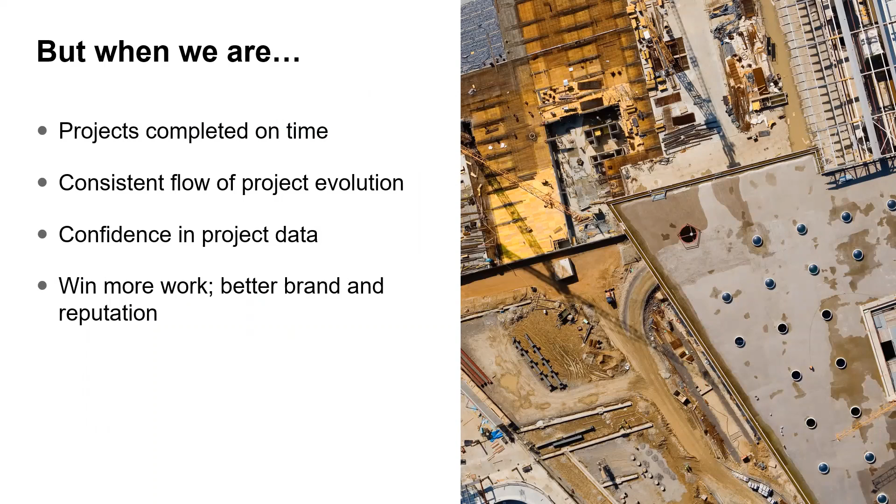Shared data allows assertive decision-making and enables predictive insights. Documents are shared so work happens from a single source of truth. All this gathered data enables construction teams to better deliver and even predict business outcomes. When we are collaborating effectively, important updated information is in the hands of those who need it. Issues can be shared across teams quickly, leading to faster resolution and helping us deliver projects on time and on budget. We'll now go into a short video outlining some of these functions.

The Autodesk Construction Cloud is built on the power of a common data environment, ensuring confidence in project data and a single source of truth. The common data environment starts with files, a configurable folder structure designed as an organized repository for all your project information, from Revit models to PDFs, Excel workbooks, and over 40 other file types, accessible and viewable for all project members. In the connected modules within the ACC platform, such as Build, the project management tool, we see the same file folder structure, ensuring a single source of truth for all project members interacting with the data.

Project members on site will have access to all the same files and folders through the Autodesk Construction Cloud mobile application based on their permissions as set by the project administrator. When we are connected through the common data environment, project members can have confidence in the information they are working with, such as the latest set of drawings, leading to less rework and on-time completion.

All right, now we'll be talking about controlled file sharing.

The Autodesk Construction Cloud includes extensive permission and file sharing features that allow you to ensure that the right project members have access to the right information, limit what certain roles or companies have access to, and share information with those outside of the platform.

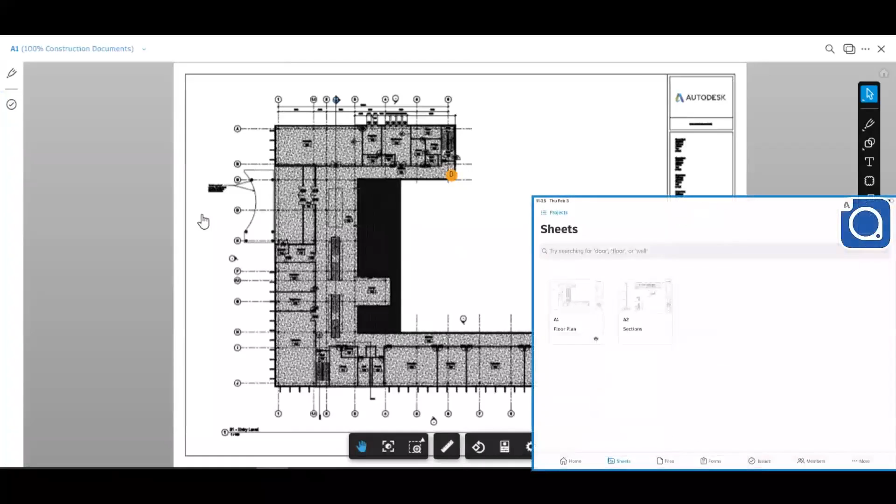Stay in control of who you share documents with, how long you share them for, and keep track of all your transmittals in one platform. On to real-time collaboration.

When we aren't actively collaborating amongst different teams across a project, we can run into a fair number of issues. Without a central source of truth for project documents, how can we be sure that everybody is working off the most recent information? On-site issues and requests for revisions are done by email or by phone, not easily tracked or documented, which can lead to more time spent hunting down documents or waiting for responses, which can affect the schedule and budget of a project.

Another issue is the inability to actually access model-rich information because you might not have access to the right type of software, whether it's Revit, or you don't have the expertise in working with Revit. But when we are collaborating effectively, less time is spent on rework because communication is easily tracked and important project information is accessible to everybody who needs it.

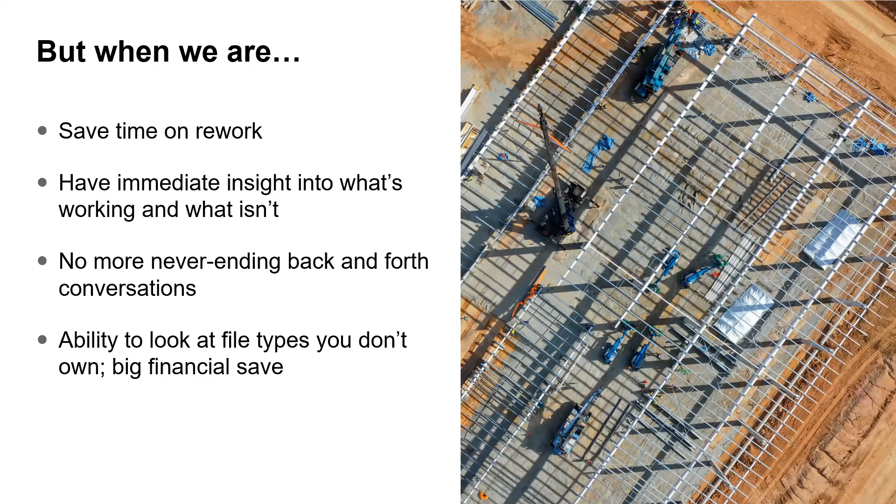Easily see and track issues across teams, you know who is working on what, and actually being able to access things like the model when you're in the field without any specialized software or any training to be able to extract some of that model-rich information and have it accessible to you. We'll get into a short video explaining all of that.

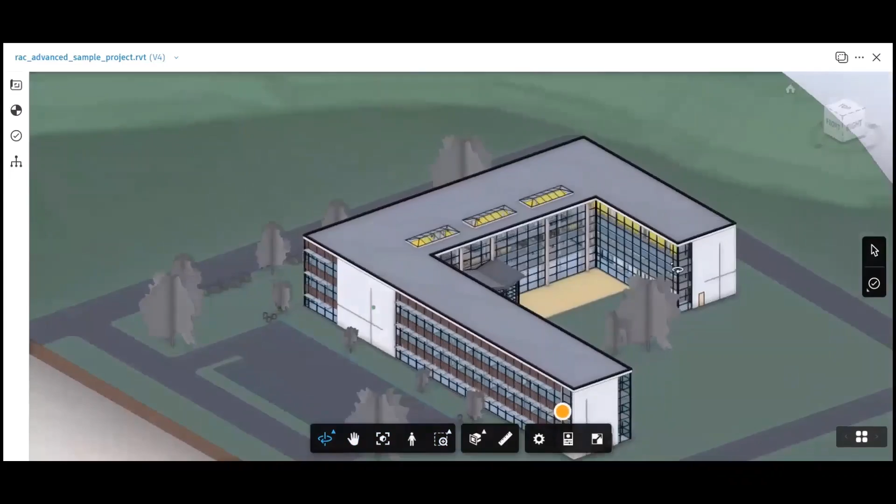Collaborate with team members in real time through in-platform model viewing and seamless communication in the form of RFIs, submittals, and meetings. Architects and engineers can upload their models to the ACC platform, making them accessible for viewing by all team members. Even if you have never used Revit, you can still access this file type on the ACC platform and take advantage of the rich data within, ensuring you stay up to date on all the latest 3D models.

Any unclear information coming from these models or drawings can be addressed through submitting an RFI. A formal request for information is used to obtain information from other project members. Track the status of an RFI after it was submitted, when it's in review, when it's received an official response, and finally when it's closed and distributed to the project members.

Similar to the workflow of RFIs, submittals are documents created for approval by the project stakeholders. Submittals are usually shop drawings, technical data, product specifications, or samples. They group into items, which consist of a document or group of documents, or packages, which consist of a group of items. Submittals go through a formal review process from a request for submission to closeout and distribution.

Another important tool for real-time collaboration is meetings. Use the meetings tool to create meetings, create agendas, including meeting topics and items, assign statuses to items, generate meeting minutes for important decisions, track attendance, and create follow-up meetings to track ongoing items and issues.

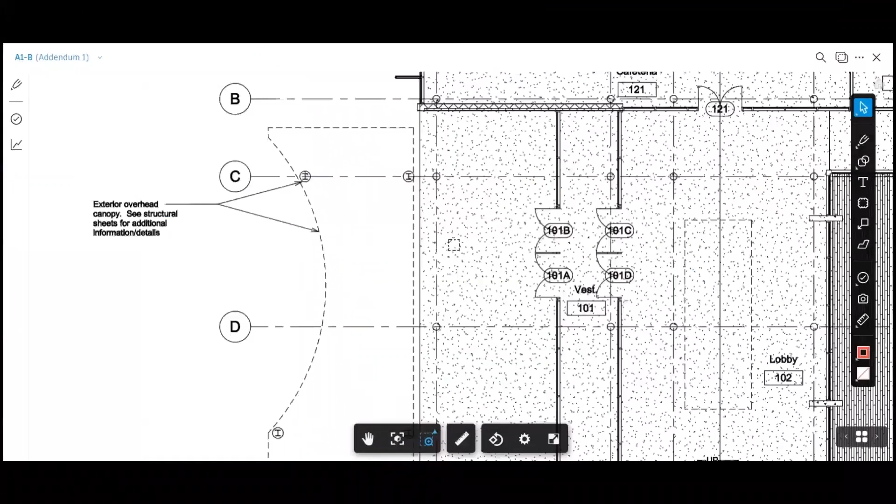When you observe an issue on site, you have the ability to add a pin to the corresponding construction sheet by selecting an issue type from a highly configurable and customizable list of categories and types, automatically creating an issue in the process, and more details can be added, such as adding a photo as a reference. Keep track of issues and their progression through the construction process, hold people accountable for their mistakes, and stay up to date on the status of assigned issues until they are resolved.

So we'll talk a little bit about the Autodesk Construction Cloud and where some of these functions and features can be found across the different products within the platform. So the Autodesk Construction Cloud is at the moment made up of 3 pillars, being Autodesk BIM Collaborate and Collaborate Pro, which some of you might be familiar with if you're doing cloud-based Revit work sharing. There's also Autodesk Takeoff, which is a 2D and 3D quantity takeoff tool hosted in the cloud. And then Autodesk Build, which is the project management, site visits, handles that aspect of the project.

All of this is built on top of document management, which is included with all of the different modules and also is its own standalone item as well, which allows for version control of documents, markups and issues on construction documents, and can host a variety of different file formats from Excel documents to DWGs to Revit files. Everything sort of built off the backbone of Autodesk Docs.